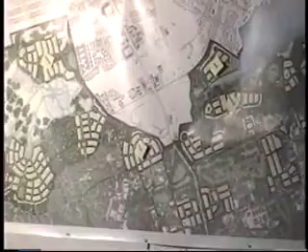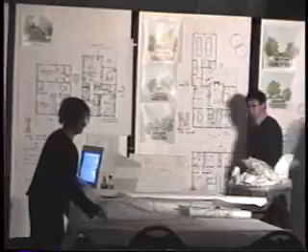I would like to take this time to say how appreciative I am to the team of Clark Pinnacle and Torti Gallas, the architect who's been here to work on it. It's pretty amazing to me to watch this. I have not had to work till 10 or 11 o'clock at night, maybe later, but it's been amazing, and I think it's been a wonderful partnership. We have tried to be flexible, and I think everybody knows this thing is coming together in a way that's going to benefit Fort Belvoir immeasurably.

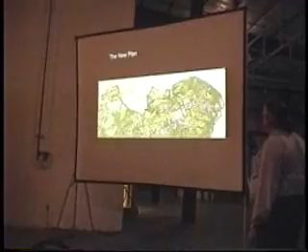One of the things that immediately became obvious in making the new plan is in working with the folks from PBS&J, the master planners for the post, some interesting possibilities, not the least of which was the possibility of creating a real town center in the South Post. And we'll see that in detail.

One of the things that also came into play, and this was a true real-time charette, things changed almost every hour. For example, yesterday around 3 or 4 o'clock, we learned that there was another site potentially available for us. That was the Tompkins Basin site. Previously, that had been off the table. Now, that site is right in there. Wow, what a site. And that's a whole other possibility.

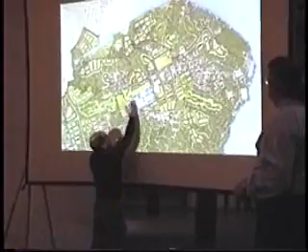So these things were constantly in flux, finding a site for the RV parking if we use the land that might be there, working around the train shed, trying to accommodate maybe a million things to track relative to the administrative areas. Crossing that potentially is a main street. We would imagine that main street to be lined with housing, perhaps bachelor's quarters above stores, perhaps even family housing above the shops, which John, I think, will show you in a few moments. That might really help to enliven that and make that into a fabulous place, coming together.

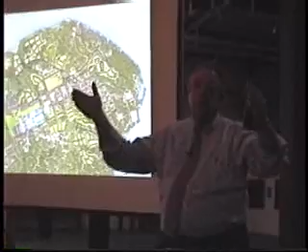One more interjection here that became more and more obvious to me is that the RCI, and I think it's a puzzle we're all going to have to work on, brings hundreds of millions of dollars worth of construction to this post. So there's a lot of clay, if you will, to provide homes and neighborhoods and buildings to Fort Belvoir.

It's a very unique program because it is so large and it's going to have such a profound effect on the post. Near where the train shed is, right here, there's the possibility to go down to the Potomac River edge, and we've been talking with MWR folks about the possibility for a set of playing fields, baseball fields, whatever fields are necessary along the Potomac River edge, in the floodplain or near the floodplain. There may be some amenity buildings there as well. So really the whole post gets this fantastic riverfront opportunity, and the houses are kept up high with these incredibly long, distant views.

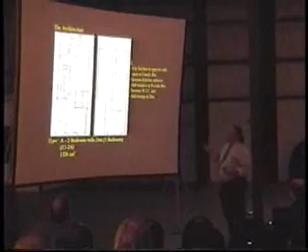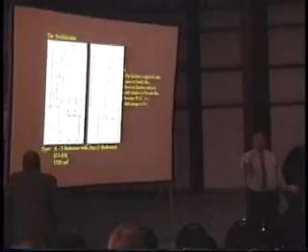This is the same house blown up a little bit so we could see the floor plan. It has a porch. Bruce, come on up here. This is Bruce Kennett. We incorporated one very large room instead of separating this into two rooms. I think for this house, it's absolutely fabulous.

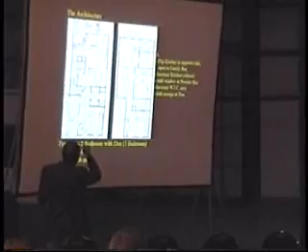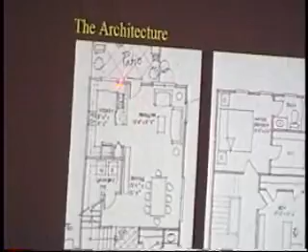Another thing we did previously, the patio was situated right behind the kitchen, with a door going from the kitchen to the patio. We expanded the patio and put the door over here in the family room to get better access to the patio, in case you're entertaining—you don't want your guests walking straight through the kitchen.

We increased the kitchen cabinets. There's more linear feet of cabinetry now. Before there was no window here in this powder room. We added that window.

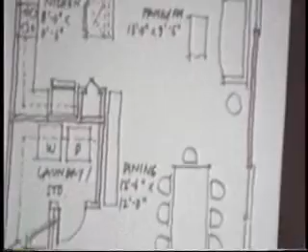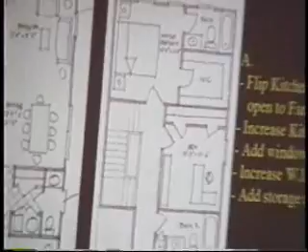We added storage at the den—this is the den here. We added a storage closet and increased the walk-in closet size in the master bedroom. This is the bedroom den. Yes, it's a bedroom den. It could be labeled whatever you want it to be labeled.

So we thank you. We think this house got better. We really like this idea of the great room kind of thing.

A note about patios and patio sizes—this is another one of those deals that's a dollar issue. It's being priced right now, and making patios appropriately sized for the house is the goal. The submission essentially had 10 by 14 patios in every house. We're going to try to get them increased and more appropriately sized for each house.

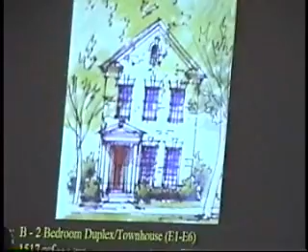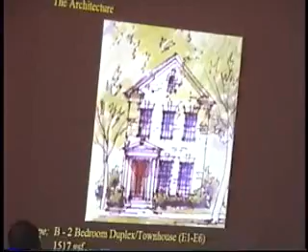This type house is also a house for grades E1 through E6. It is 1,517 square feet. Our gross square foot designation in all of the houses does not include the exterior storage or the garage—exterior storage or the garage is in addition to that number.

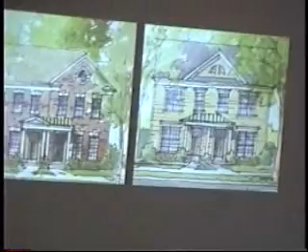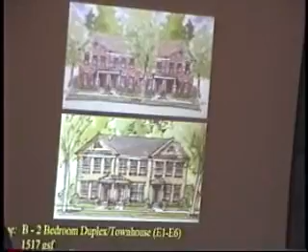This house type does a lot of work for us. It operates as a single-family detached house, and it also operates as a duplex. Here you see it in a brick facade, here in a siding facade, and here as a set of row houses, or townhouses. So the idea of this type, and being able to use it in several different ways, will help us get more variety and a wonderful look in the neighborhoods, as well as increase our overall density.

In the intake, there was a 10 by 10 bedroom in this plan that we blew away—that was too small.

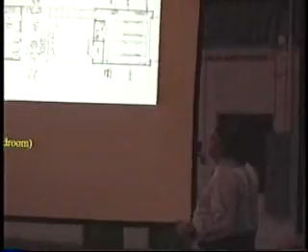Front doorway, front yard—this would be a townhouse coming with a backyard patio area, and we hope to achieve a 25-foot plus backyard in this direction. This house is 21 feet this way, with exterior storage and a 2-car garage. Next.

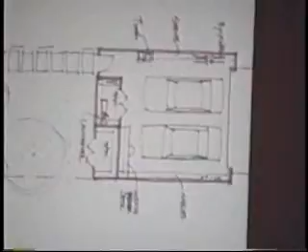The house itself has an entry foyer, living room, and dining room. This house, by the way, is the one that is taped out here on the floor at full scale. This is our 1,517—the smallest house in the offering, and I think it got, at least in the tape version, a very good reception.

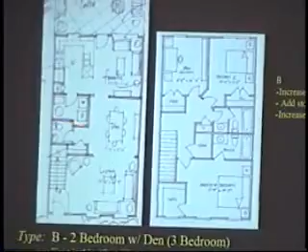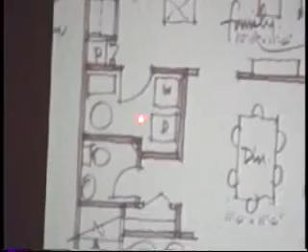It has a small corridor here, a powder room, a guest closet, coming into the kitchen family room across the back of the house, which is 11.6 by 21 feet in combination, with a peninsula island here, refrigerator, pantry, and then a laundry utility closet here, with access to the backyard. Come upstairs.

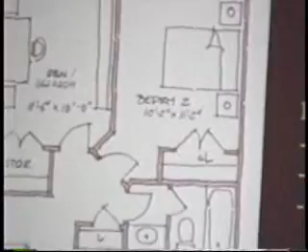We had a 10 by 10 room here with a pair of closets. We wound up with a deeper storage closet here and made this 10 by 11.6, suffering the insult of one cranky wall, but we're going to go home and try to work that crank out of it. Even if we had to suffer with it, it still makes this room a lot better than a 10 by 10 room.

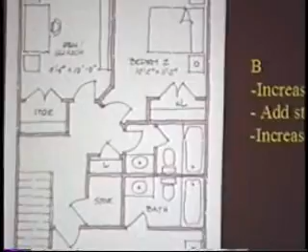This one's 11 by 10 with inches, 2 baths, interior storage, a large linen closet, an 11.9 by 14.6 master, and a very nice large walk-in closet. Again, all of our houses have master bathrooms off of master bedrooms.

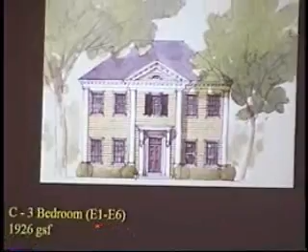Our 3-bedroom, 1,900 square foot house—this is 1,926 square feet. Again, these would be houses for E1 through E6, there's a 9 there somewhere, okay. And this would be a siding house in a Georgian style.

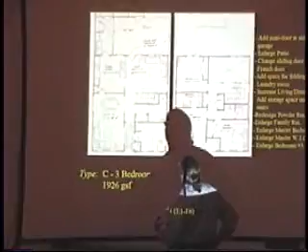Next, 12.4 by 12.0, and this room is 16.4 by 12.10. Very, very large room. This family room has a 2-story space in it. There's a volume, come up, there's the den, the extra den on the front of the house.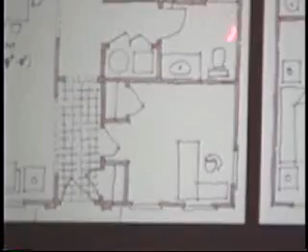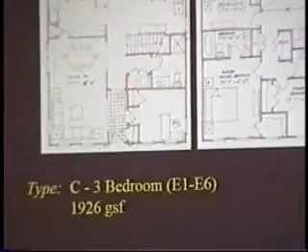Utility closet here, half bath with a shower on the first floor. Somehow we've ended up with an older version of this plan because there were changes made in this area and these closets. We did make that change, so we have to look at the version of it on the wall.

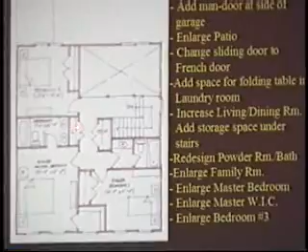The second floor, we come upstairs, and we have a pair of second bedrooms. This one 10.6 by 12.6, and this one 11 by 11. The hall bath, storage, linen, and a master of 12.4 by 16.3 with a master bath, double lavatory, and a walk-in closet.

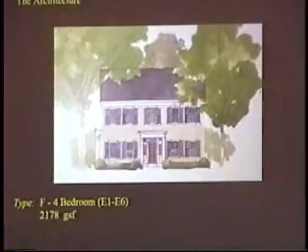It's 6 o'clock, and I just want to give you a little... Okay, I'll tell you what we'll do then. I'm trying to figure out how we'll do it more quickly.

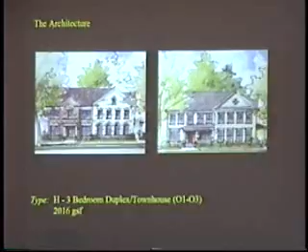The O1-O3 duplex house—we're showing these in duplexes and triplexes. This is the attached, higher density version of this house. It's slightly over 2,000 square feet.

Intake comments, site plans. This H type is a very popular type. It does have a detached garage. And its plan—you can see this is one of the older computer drawn plans because we had very, very few comments about it.

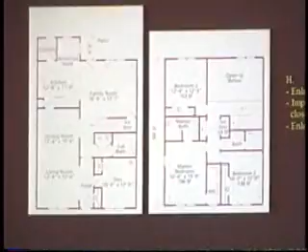Living dining room, kitchen, large family room, den, full bath on the first floor, and a two-story family room in that back corner. Several of our plans have that feature. The bedrooms—secondary bedrooms, 12 by 12 plus, 10 by 13 plus, and the master is 12 by 15.

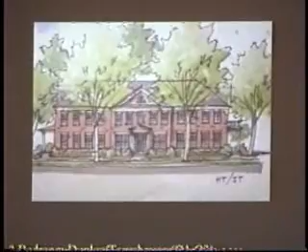This house—and before Cleve jumps out of his seat about this expensive facade, because it is expensive—we have ones that mediate it. But if we are thinking about bringing some of the housing into the core of the base, the dignity of the architecture of the houses that come to the core needs to be commensurate with the other more important buildings that are there. So this is that kind of move, if you will.

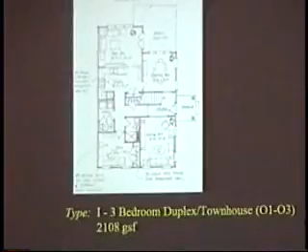In the front, again, to help our variety, but that shows the end elevation—O1-O3. The end entrance house comes in, living on one side, dining to the other. Then up front, a utility room, full bath, kitchen, family room, backyard, great house.

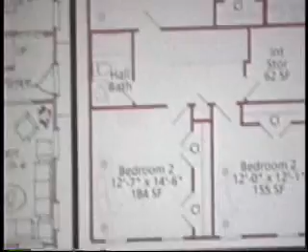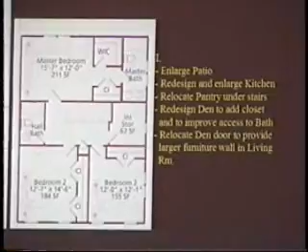Do we have a second floor to that? Here we go—going upstairs, this drawing is one of the other drawings that survived. These are the drawings that we didn't change. 3 bedrooms: 12x7, 14, 12 by 12 here, 12 by 15.7 for the master. Storage closets, walk-ins, closets, master bath with 2 bowls, hall bath, a lot of storage.

Next: O4-O5, a 4-bedroom version, 2,485 square feet. As I mentioned before, the detailing of the houses gets more refined as the grades go up.

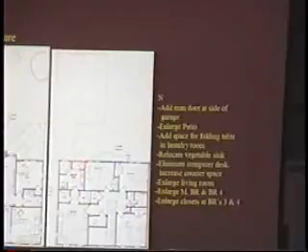N type, same format, house, the length, the garages. The plan itself, in this case, the center hall colonial: dining on one, living on the other side, large family room to the rear, kitchen, breakfast nook on this side, den, full bath on this, master suite with a pair of walk-in closets, elegant design details as you could possibly put on the facade.

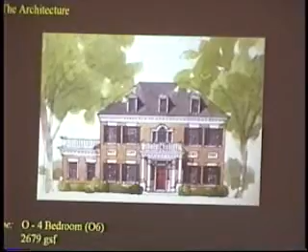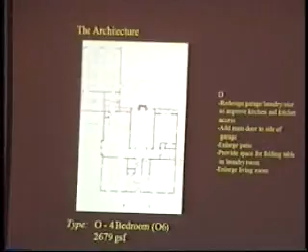Go ahead, O type. I'm sorry, this is really too blanched, but it basically has living, dining, large kitchen with breakfast nook, large family room, den, full bath, and then upstairs.

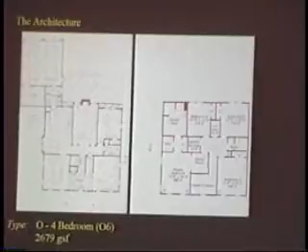And another unchanged plan with the master bath bedroom suite on one side, 4 ample bedrooms on the other, with a whole bath, tons of closets and interior storage. The next to last type we have, and I think we're showing 1 or 2 here, Jeremy.

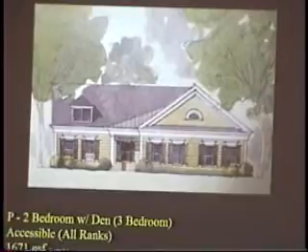We're showing both. Okay, this is our 2-bedroom den, 3-bedroom accessible. What we did in the accessible units is we selected the largest size, so these are all ranks get the same size. We will have a hierarchy of facades going up, but this floor plan is the same for all of this model, with an easier flow. The den in this case here, plus the 2 bedrooms on the end of the house.

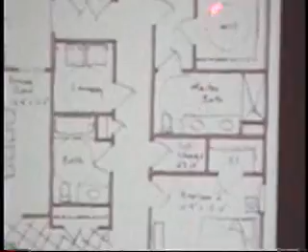The master with its suite. That might look like a nursery here, but it's really the walk-in closet. And since the walk-in closet needs to be wheelchair accessible, these rooms get fairly sizable. As I said before, every room in the house is wheelchair accessible.

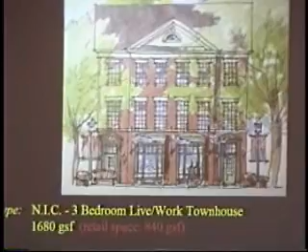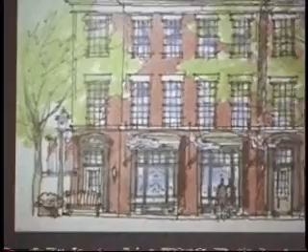The NIC, this is the last type that I'm showing. This is the idea house. This is the one that doesn't fit into the program, but is generated primarily because we're trying to understand some things about what gets built and when. Essentially, this is a house that many private developments have been using in recent years.

This is called a live-work house. This house essentially is very old-fashioned. You can come up to Kentlands, Maryland and see versions of this house that are a lot bigger than this, selling for $650,000, that my firm designed. This is a store. This is the place where the people live. This is a house here. This is a pair of them together.

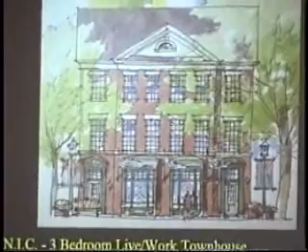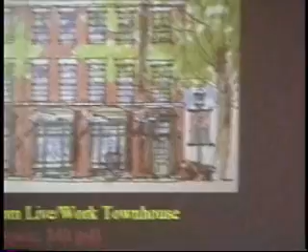This would be a wonderful kind of building to use if one wanted to initiate Main Street right away. But you would have to find the 20 or 30 couples. These are really houses where kids are not so easily placed. They would be couples that would want to live over the store.

The big hurdle for the RCI is, will RCI allow you to build a store? Those are not questions that I have answers for. But this house looks like this.

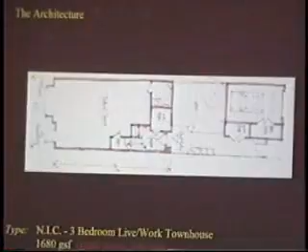Go. Oh, no, go back. No, where's the floor plan? The wrong one, okay.

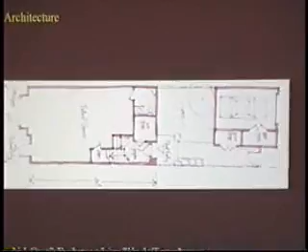There's a retail shop on the first floor. There's a street in the back of the house where the residential entrance is. Come in alongside the garage. There's a backyard. There's a residential entrance that you go upstairs. In case the people that live there are doing the shop, you can connect both.

Go ahead. Upstairs, you have a living room, dining room, kitchen, family room, and you come up to 3 bedrooms and 2 baths on the top floor.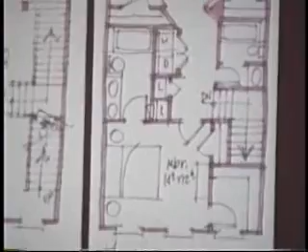This can be 100% modified for all military requirements. You can't look too close at this, but this generally fulfills a 1,600 and 90 square foot housing program. I think it's something to think about. It's the only reason why we put it in.

Cleve had an idea that this general philosophy might be something that you look into in your unaccompanied housing. It might be easier to get the fit, but it is a house type that brings the recreation of the core into a real possibility, I think, quicker.